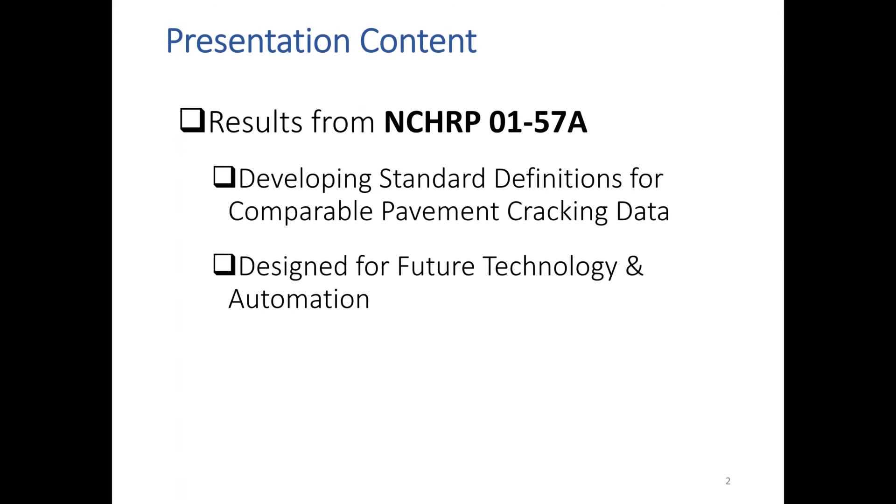The motivation for this project came from the problem statement that was submitted 6-7 years ago, and it finally became a project. That's how to define a set of cracking information so that it can be used for network level surveys and also for future technology and automation. Here are the objectives of this project. The first one is to develop cracking definitions for both asphalt and concrete.

The second is to help service providers and the DOTs have objective cracking measurements. The new definitions would fit into continuing technological innovations. The third is to facilitate comparable measurement and interpretation of cracking. As we know, every state has different practices of how to collect and interpret cracking information. I'm going to show you some of the data from the survey.

Number 4 is to have sufficient details to meet requirements so that automated methods are compatible with existing and emerging technologies. Even though this task was primarily for network level surveys, we think it should meet some of the needs at the project level. So that's a summary of the 5 objectives of the project.

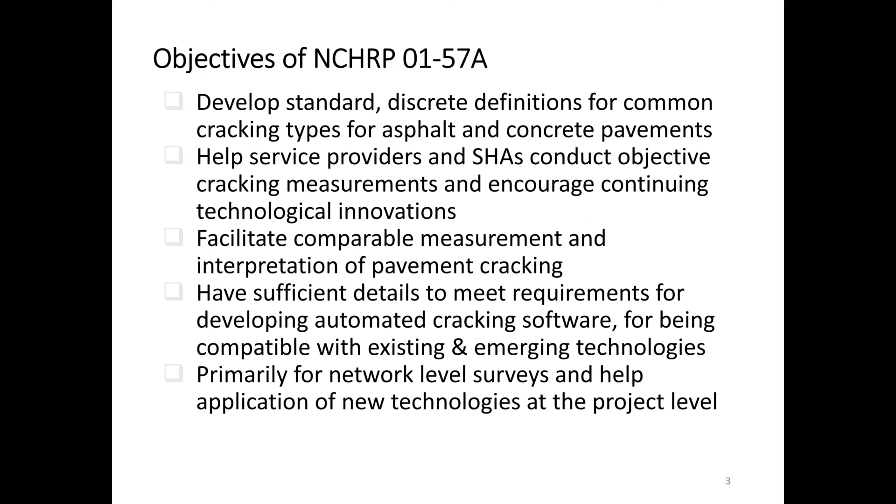The first portion of the project was a survey of state highway agencies. We did this about 3 years ago. We have cracking data collection, processing, and common issues as part 1, and cracking definitions of transverse, longitudinal, alligator, block, edge, durability, corner break, and other cracking data. Part 3 is wheel path definitions. We asked questions about that. And we all know that AASHTO has a current protocol called R85-18. We'd like to know how many agencies are actually using or implementing this protocol, and general comments.

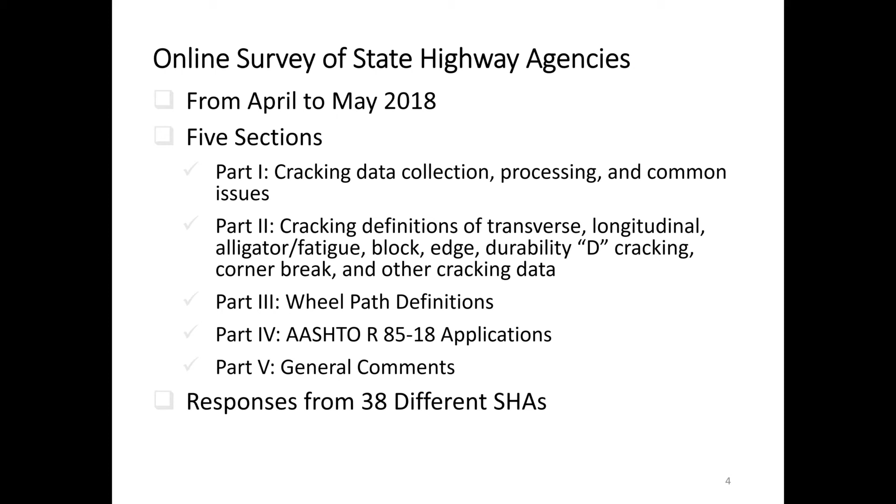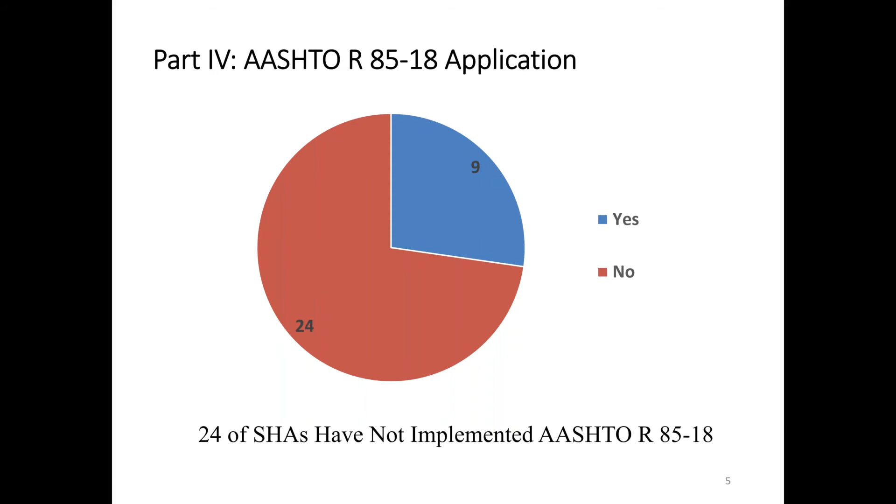We received responses from 38 different DOTs, which is very good, we believe. We have a published report online, so I'm not going to go through all the survey results, but I'm going to point out what I think is important for the audience. In part 4, we asked how many agencies are using the AASHTO protocol, R85-18. 24 of them have not implemented it, and about 9 of them have. So it's a small minority that are either experimenting or using the AASHTO protocol, and that tells this community that there is a serious problem regarding how to standardize cracking protocols or definitions.

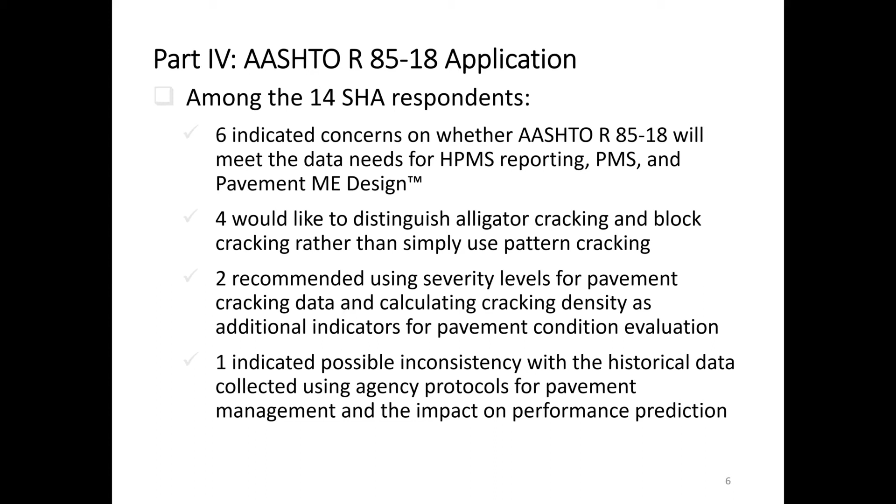I'm not going to read the whole thing, but from 14 DOT responses, we have this level of detail regarding AASHTO R85-18. Some of the general comments are interesting; 23 of them provided general comments, and some are the same or similar. For example, we have these 4 comments: development of a cracking certification standard or practice, similar to that of ride quality. This is the number 1 interest.

We know that IRI has been used for several decades, and in the recent couple of decades really became a de facto standard, not just in the US, but worldwide. There's tremendous interest at the state and federal level to have something similar. It's going to take a while, but we need to start somewhere. The second one is improved cracking detection accuracy, particularly in concrete pavements. Concrete folks know hairline cracking is still very difficult to detect even with 1 millimeter devices today. The third one was to provide a protocol that can keep up with technology. That's definitely one of the objectives of the project.

And then lastly, can we collect the cracking data and get the results out while data is being collected, like the IRI devices today for longitudinal profiling?

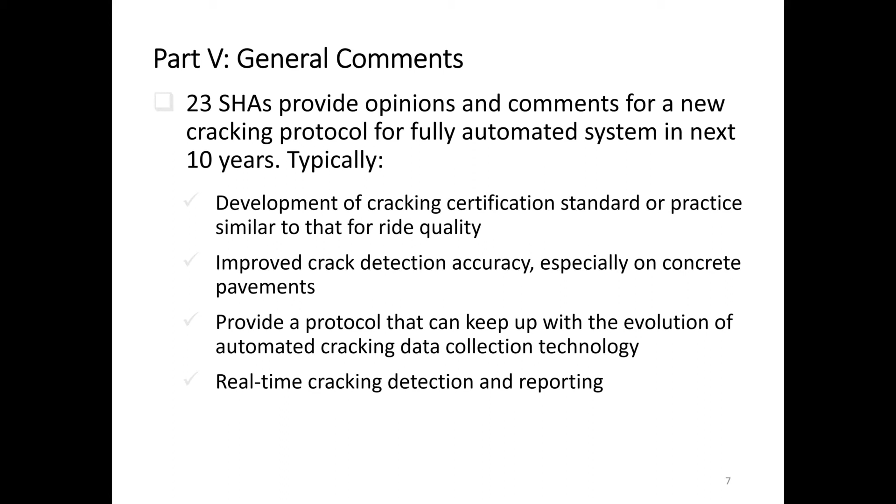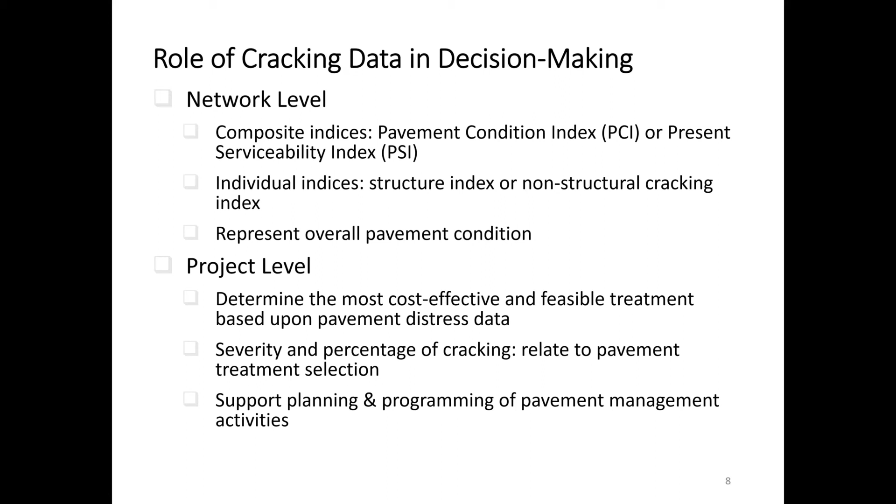Okay, all those are very lofty goals, and I think some of them are addressed in this project. Role of cracking data in decision-making, network level, project level, those are very, very important. I believe state DOTs would like to have some kind of protocol standard that can meet both needs instead of just one.

Cracking data is very important, as we know, particularly in this session many people talked about that in a lot of detail. It is just very important for both network level and project level, for pavement management and for pavement design for that matter, and also for federal reporting purposes.

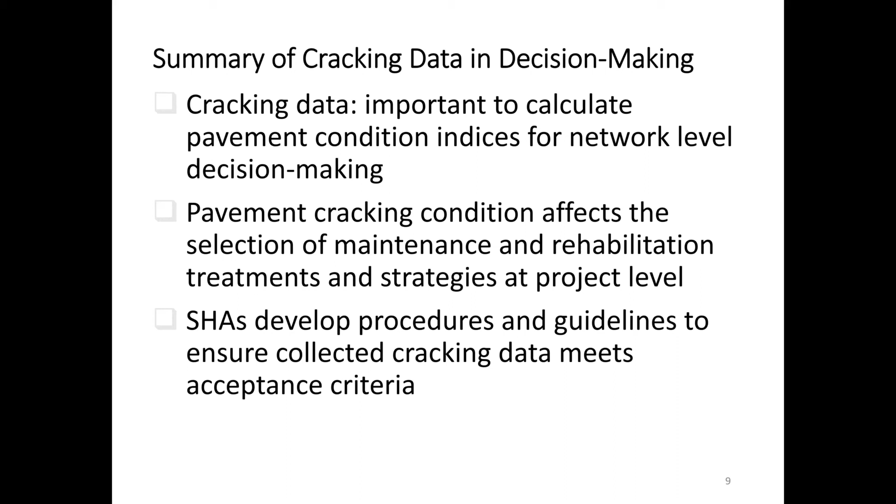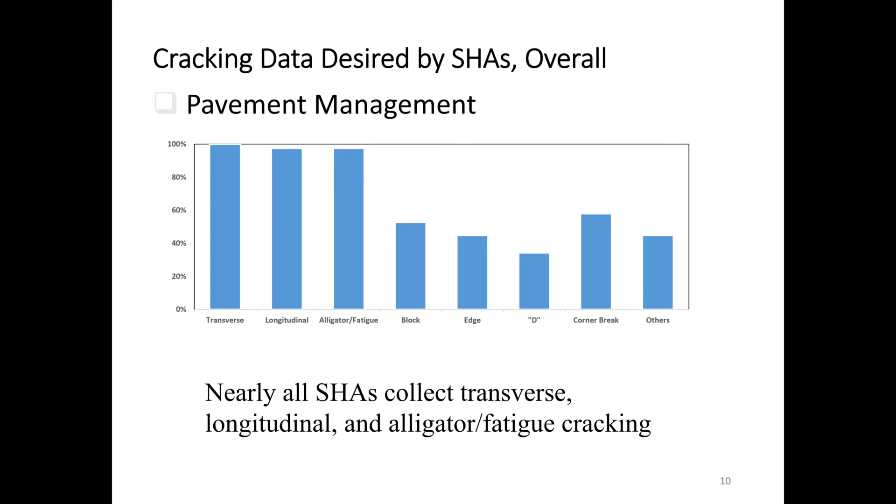Cracking data for pavement management, that information is kind of important, as we can see that nearly all the surveyed states do use transverse, longitudinal, and alligator cracking information. Those are the surface type information, more detailed.

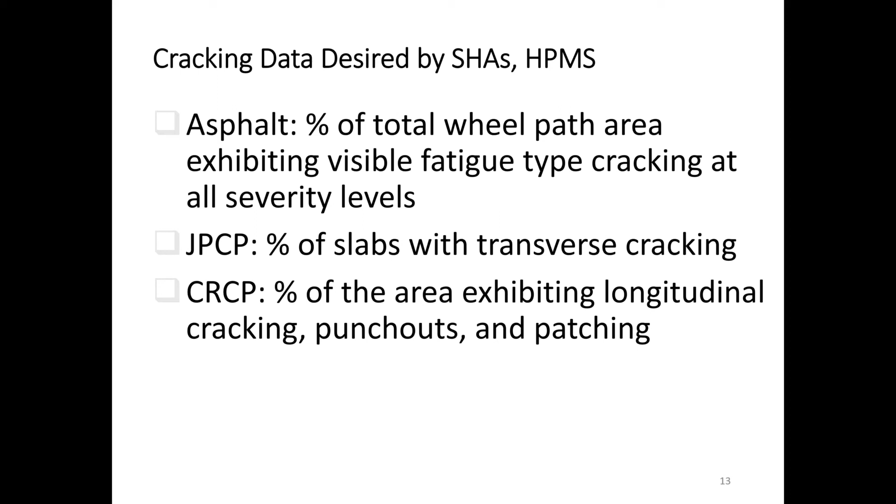Cracking data is defined by DOT folks and HPMS. For asphalt, it's percent of total wheel path area exhibiting visible fatigue type cracking. So wheel path is a critical term here. For JPCP, it's percent of slabs with transverse cracking, and for CRCP, percent of the area exhibiting longitudinal cracking, punch outs, and patching.

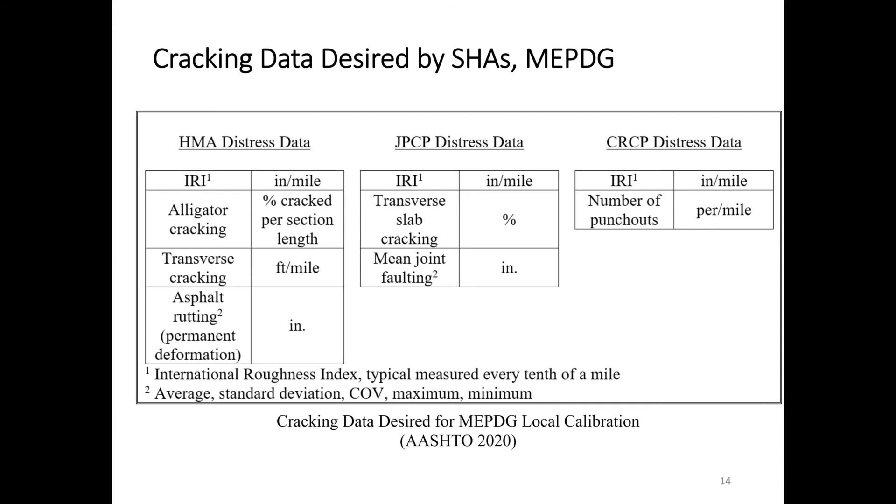For example, MEPDG, today known as the AASHTO ME design, has very specific and detailed requirements for cracking information, and we had little of this requirement in the 93 design guide. So this has been a big challenge for all the states that are implementing or using ME design, and we would like to use the new protocols to meet those requirements as well for ME design.

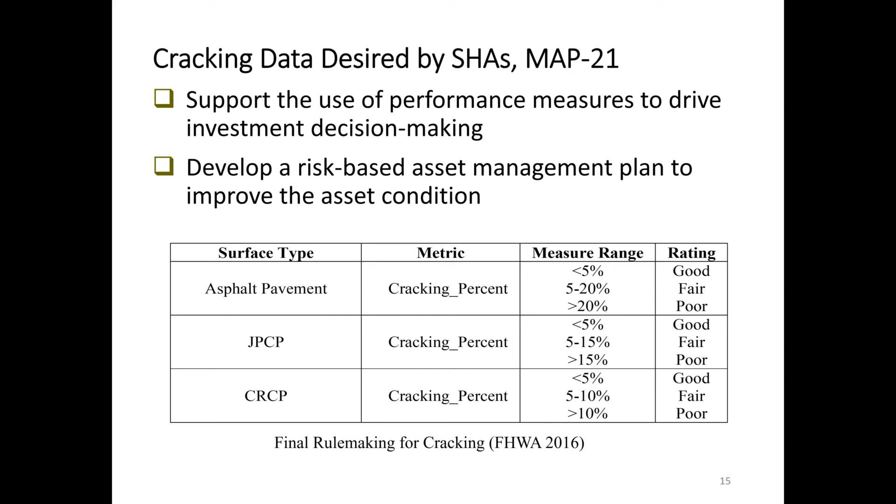Of course, MAP 21, I'm not going to read the whole slide, has a very specific cracking reporting requirement called cracking percent, which we're going to actually address directly in our proposed protocols.

Essentially, we need to define some cracking protocols that can meet the needs of network level and project level reporting, and also can actually be automated in a reasonable way. As we understand, the current LTPP distress manual and also the ASTM PCI are all excellent documents for people to use per pavement engineering discipline. But again, how to actually apply them in an automated way for both project level and network level engineering has been a failure, to be honest. It's very difficult to use them in an automated way.

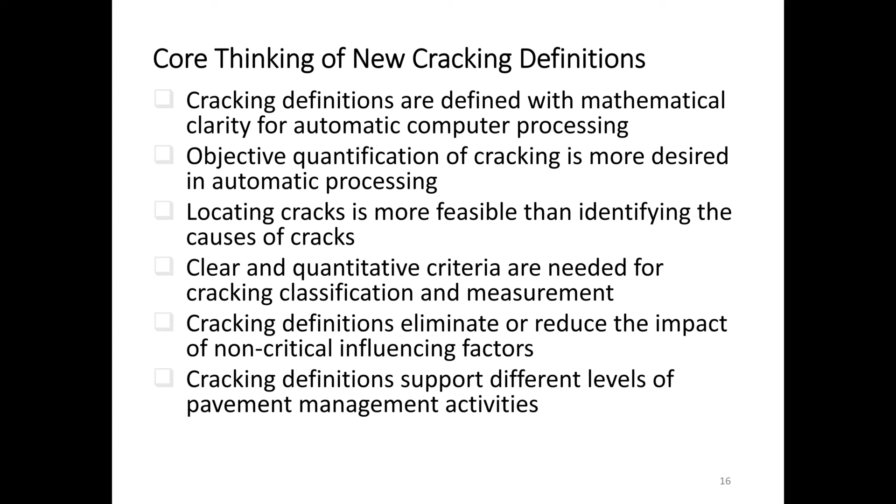So we really have to come with a clean sheet to design something that is not only useful to engineers, but also implementable in an automated environment. So here comes our proposed definitions. We essentially propose 3 levels: level 3, level 2, level 1.

Level 3 is more general, more network level, for technology verification and qualification. Level 2, with level 3 data, addresses network level pavement management. And then level 1 can be used for project level, both for management and design. So level 3 is the macro big picture, level 2 is the intermediate level, and level 1 is the detailed level. As we go from 3 to 1, each more detailed level is inclusive of the prior level, which means level 2 has level 3 information, and level 1 has level 2 and level 3 information.

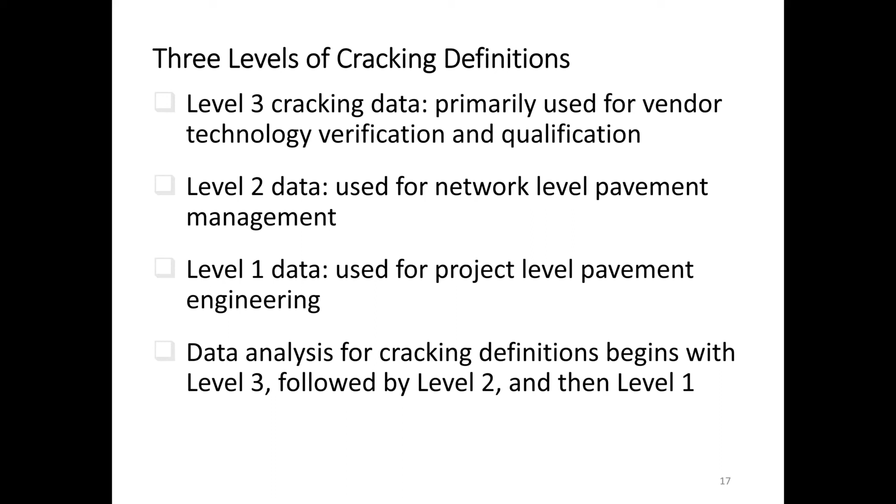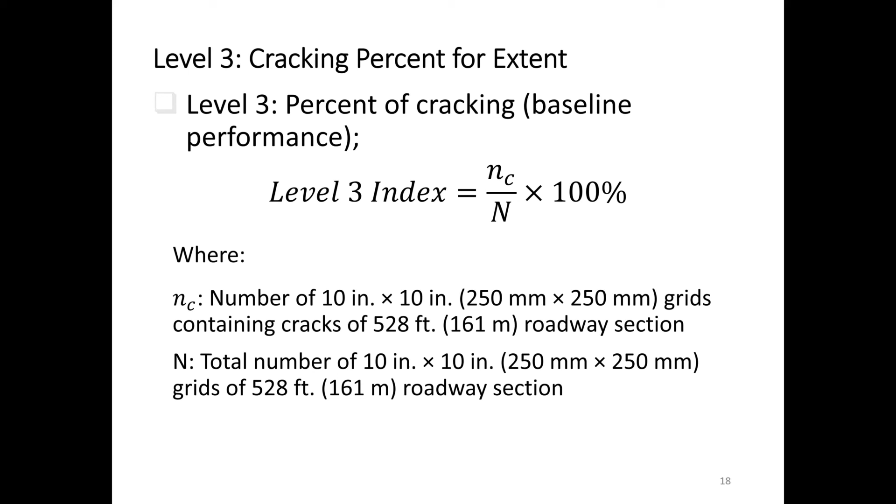Level 3 is very simple. It's very similar to what MAP 21 asks for, cracking percent. We call that level 3 the cracking percent for extent. Essentially, we define the pavement into a grid, along with wheel path definition, and then put them all into grids. The percent of the grids containing cracking would be the value we are dealing with here.

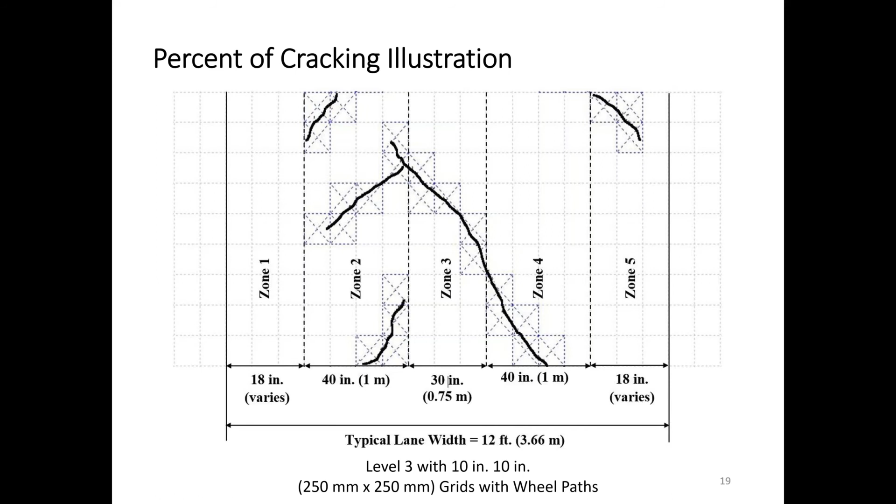So it's a very simple concept. It's actually applied by many agencies in the States and also internationally. For example, it's very similar to what the UK scanner is, which was defined about 20 years ago. The grid size matters, so the trend depends a little on what grid size you define. We have recommended a particular grid size in our report, but that grid size sensitivity study needs to be conducted in a later study.

Level 2 is cracking width for severity. In addition to the 5 zones we have with the wheel path, the two wheel paths, we have cracking width information in level 2, which includes severity information. Level 1 has cracking positions and orientations.

And that can be used for project level, both for management and design as well.

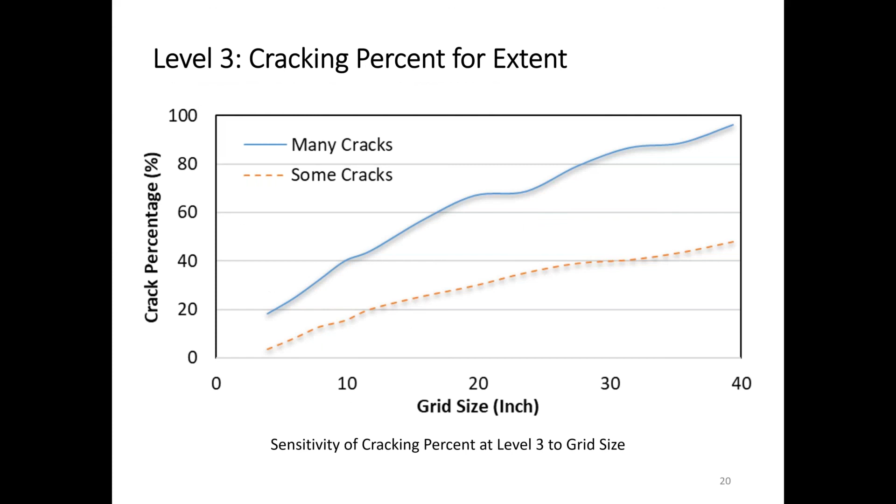So the 3 levels, in a quick summary: level 3 is essentially for extent, percent. Level 2 includes severity information, and level 1 has detailed cracking positions and orientation information.

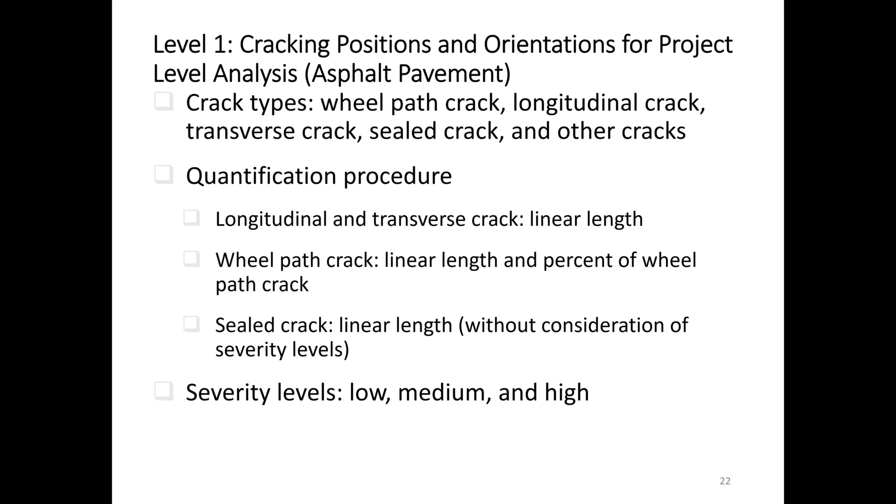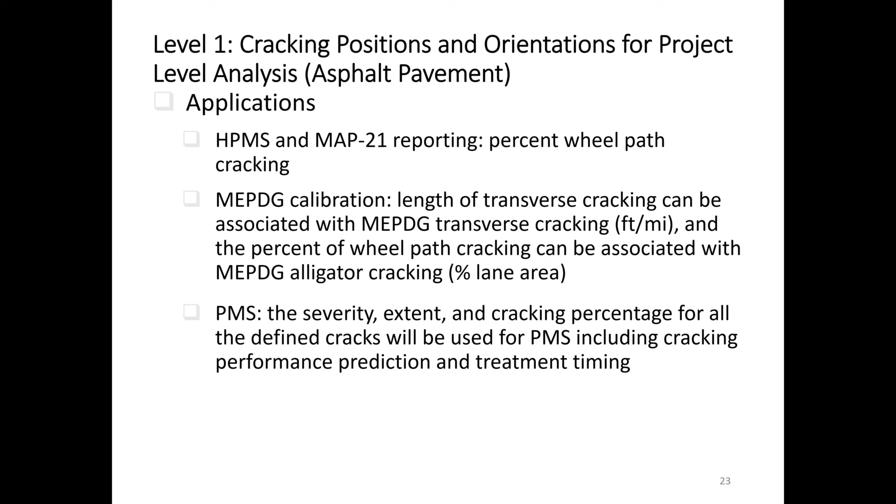Level 1, for example, what are the applications for level 1? In this particular slide we're talking about asphalt, and we can use it for HPMS and MAP-21 reporting, for MEPDG, ME design calibration, and for PMS, general PMS.

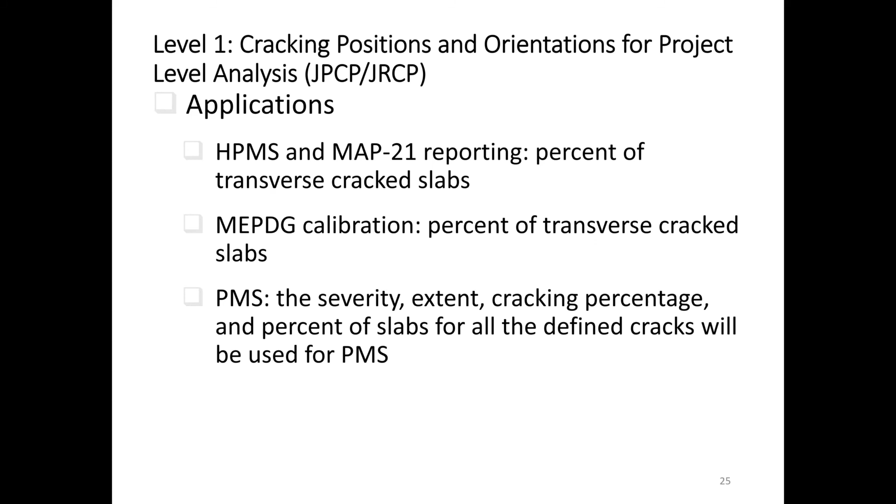Now, people would ask what are the differences between AASHTO R85 and the proposed definitions. Here are the similarities: we do propose to include crack orientation, crack width, and crack length. All right, and those informations are there. Wheel path definition is also there.

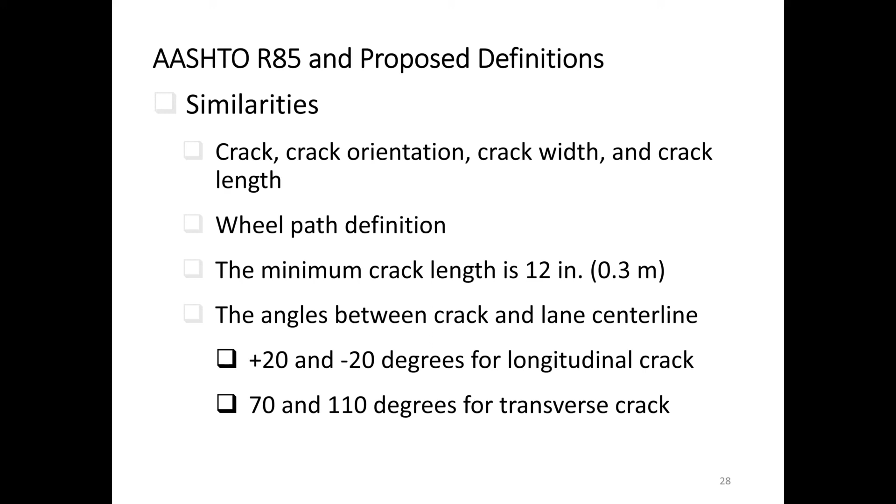Both protocols have a wheel path definition, and minimum crack length is 12 inches, or about a third of a meter, and that's the same. And then the angles between crack and lane center line to define longitudinal cracking and transverse cracking, and all this information here are similar.

Deviations: of course we are doing 3 levels of cracking instead of just one straight-out level definition for everything. Image area outside and under lane markings is excluded, so we do not consider anything under lane markings or outside of lane markings. We would propose wheel path crack and sealed crack, which are not in the AASHTO, and we would like to consider crack severity levels based on width.

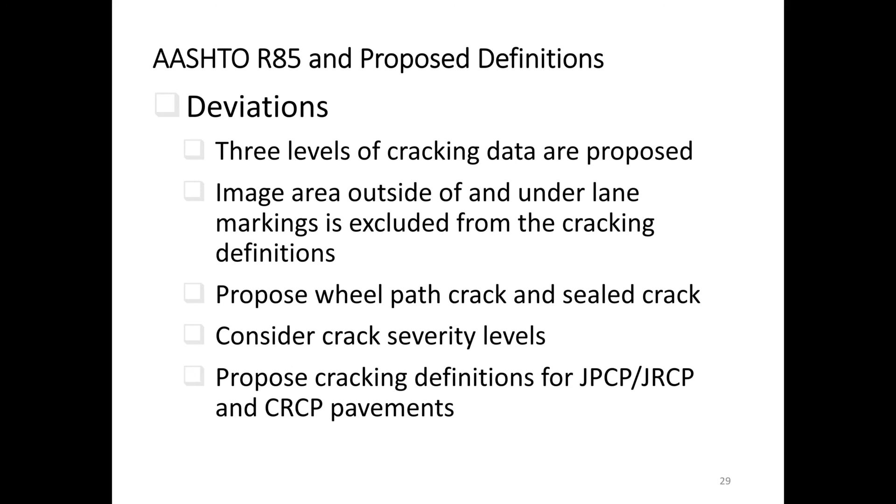And we also propose definitions for concrete pavements, cracking definitions for concrete pavements here. I'm going to show you quickly - I don't think we have enough time.

This project from NCHRP is relatively small, so it's about $250,000. We spent a lot of time doing surveys, and then after the definitions were accepted by the panel, we went ahead and did a field trial.

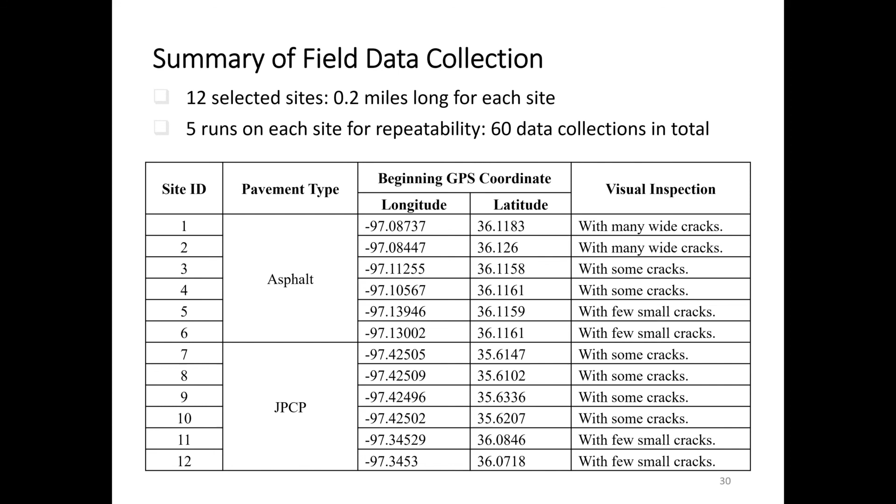So 12 selected sites, about 2/10 of a mile for each site, and we did 5 runs for each site. So we did a total of 60 data collections in all, and we used the protocols to essentially compile the cracking data and see how easy it is.

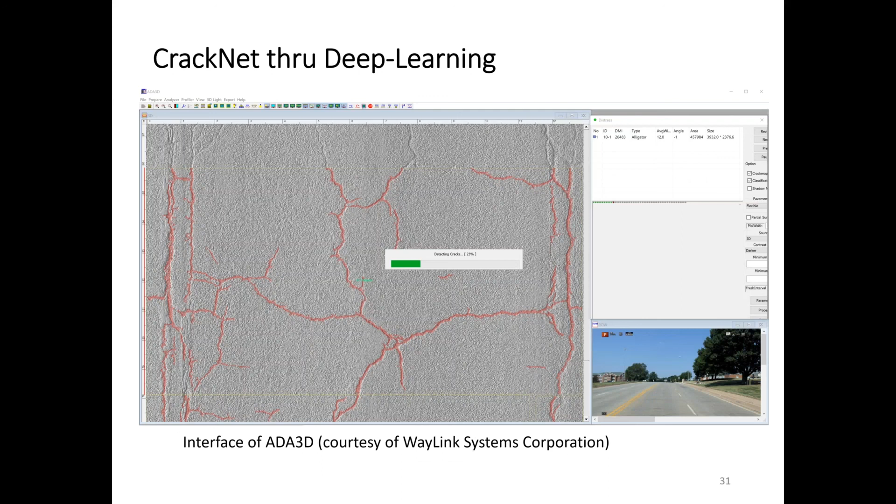Again, we used the deep learning based CrackNet, a software tool that has been in production and used by many agencies. Here's the lane marking detection, and of course wheel path and grid generation. From this to wheel path and grid, and from there we started doing the summaries.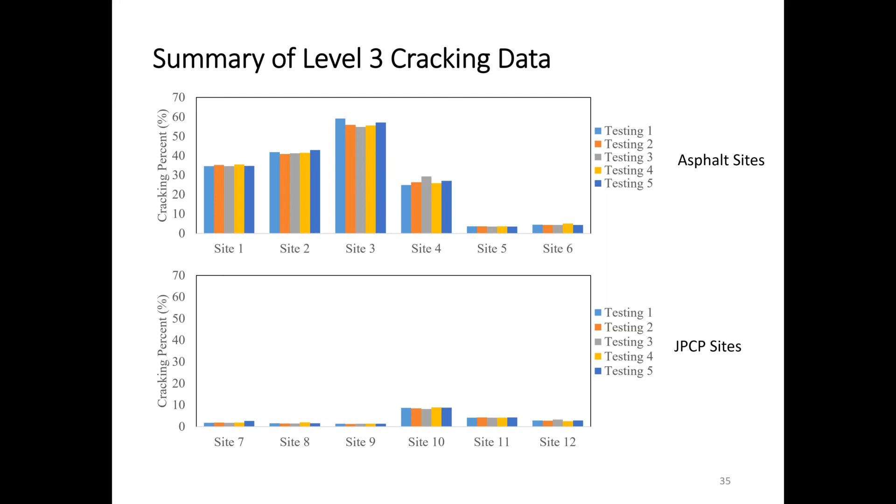As you can see, I'm not going to go into details. The trend lines are very clear when we do the repetitive driving, and we got pretty consistent results. So this is the level 2 cracking data and the level 1 cracking data. So from level 3 to level 2 to level 1, we are coming to a lot of information regarding cracking.

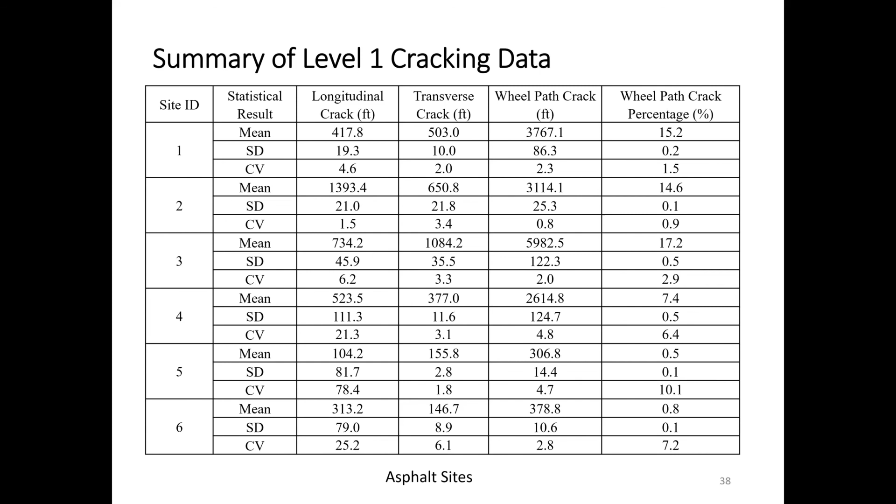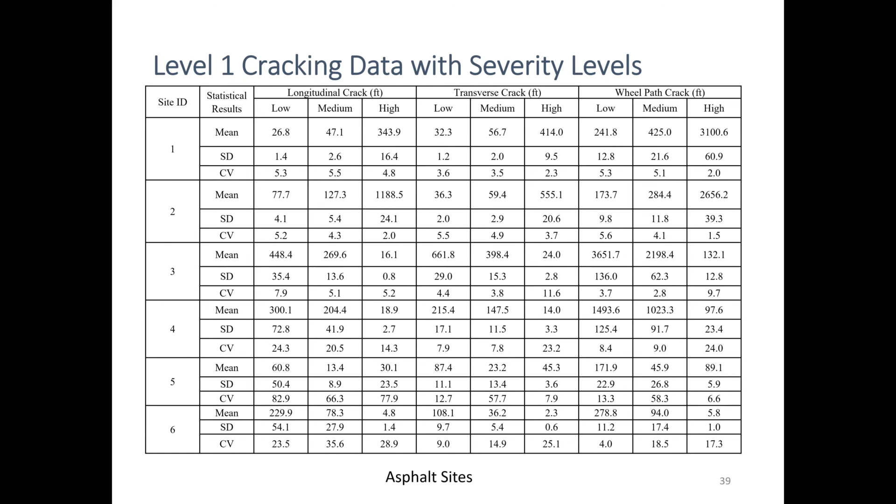For any of you who have any questions regarding this, please contact me at the university email address - I believe it's on the first slide. I really would like to hear from the audience to see how many people actually would like to get involved in the next stage of the research.

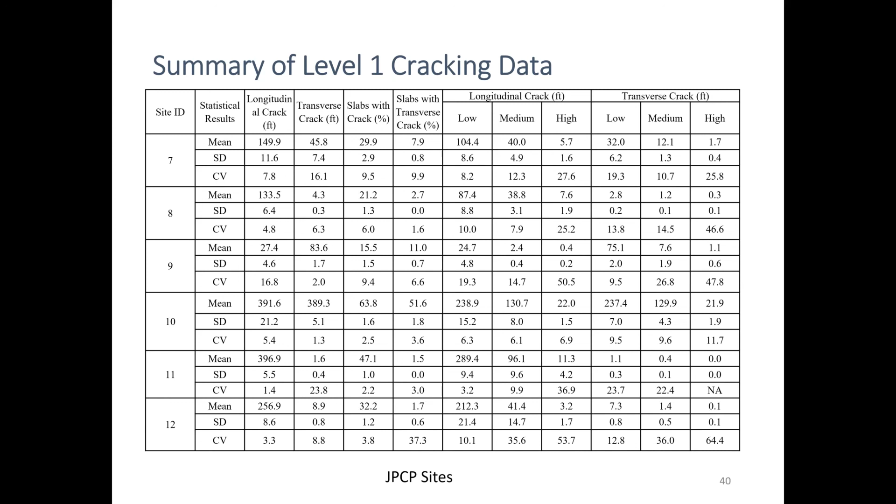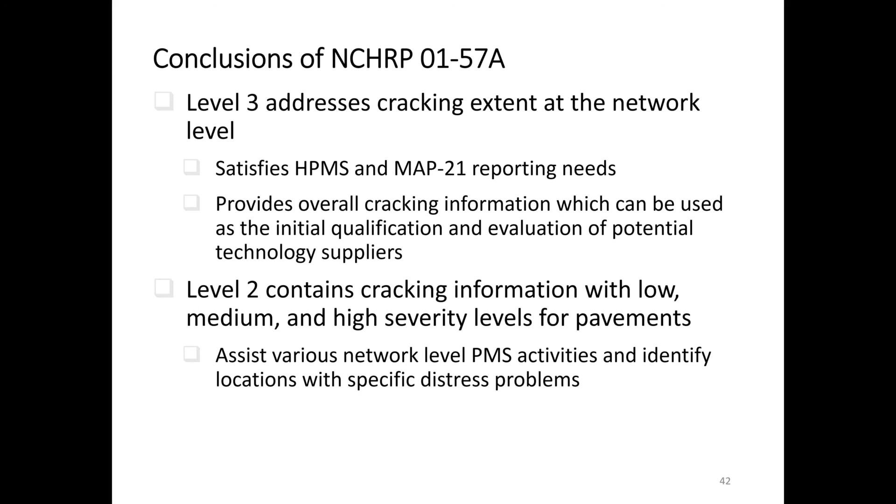Okay, so we did accomplish the 5 tasks for the project. Level 3 addresses cracking extent at the network level. Level 2 contains crack information with the severity levels or severity details. And level 1 is really further detailed regarding types of cracking on wheel path.

I hope this is the last slide, or close to the last. We are proposing NCHRP start a new project, hopefully with more time and more funds, essentially to design experiments to conduct data collection and define what ground truth cracking is, and develop a process to obtain the ground truth results.

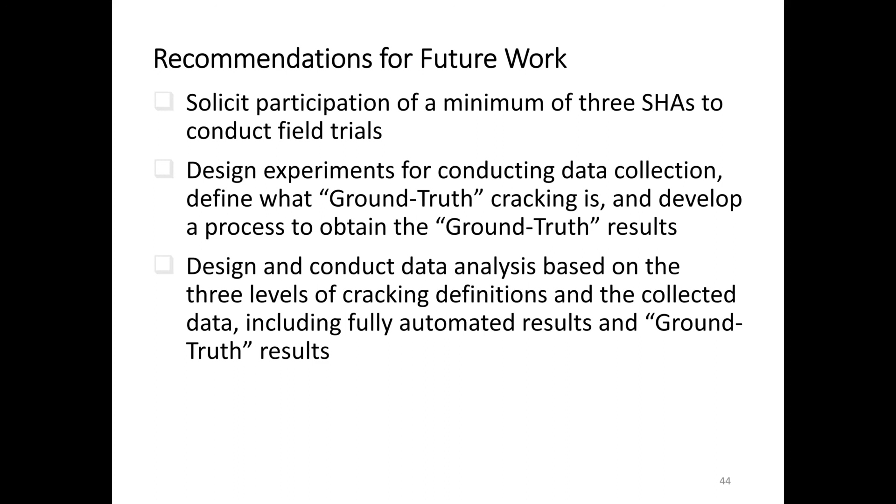And then for the 3 levels of definitions, we do the ground truth analysis with the 3 levels. And then we would like to essentially work with 3 states or more to do demonstrations on how a truly automated system can collect and process network level data, to satisfy the needs of both design and management at project level, and also, of course, at network level for pavement management.

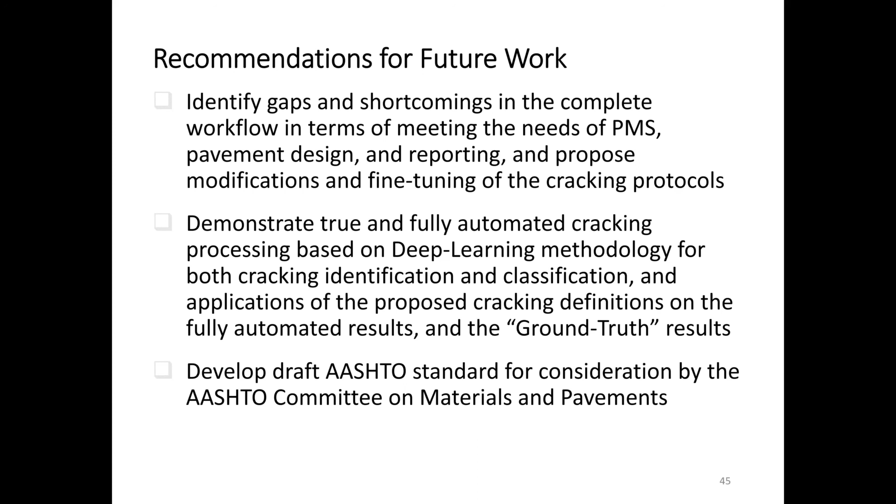So we hope that the follow-up project, if it does come - and I believe it will - is to develop a draft AASHTO protocol, for the AASHTO committee to consider either as a replacement or a complement to the current R85. So that concludes my presentation.